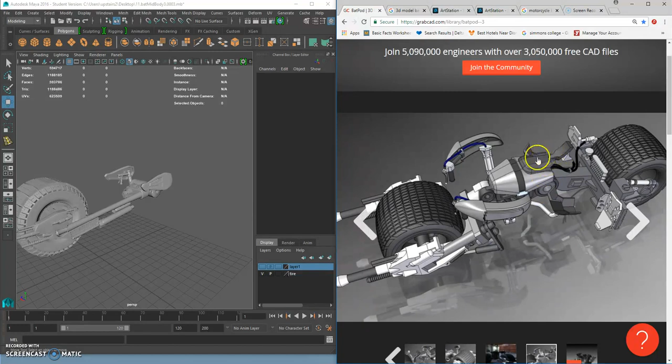Now we have to make the mid body. So it's this thing, kind of like that shape. The rider's going to be sitting here, their butt's going to be here, and their legs are going to be here, and they're going to be kind of gripping this thing. So they're going to be sitting like that.

So let's go ahead and create that thing, create that general shape. And let's go ahead and kick the subdivisions up to 3 each way. Or 2—let's do 3. I think 3 will be good.

Alright, so that's pretty good. Put it right in the middle here. You could do this—let's make it a little bit wider. Alright, good. Alright, so let's go ahead and start shaping this thing up.

Kind of come in here, taper in the back. Alright, control delete—I'm going to get rid of that. I don't want that edge there.

Okay, I'm going to grab these edges here. Let's bring those back, bring those forward. Okay, now what I'm going to do is I'm going to go to insert edge loop. Insert edge is right kind of here-ish. Face, control E, go ahead and scale in.

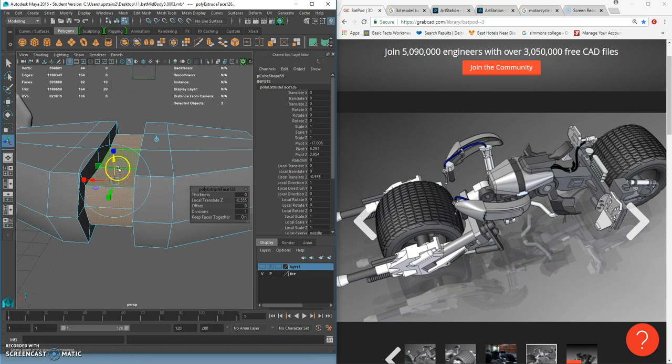Oops. Alright, I like the way that looks. And let's go ahead and hold that edge. Hold that edge, let's go ahead and hold some edges now. Our usual process—set 3 and see what that looks like.

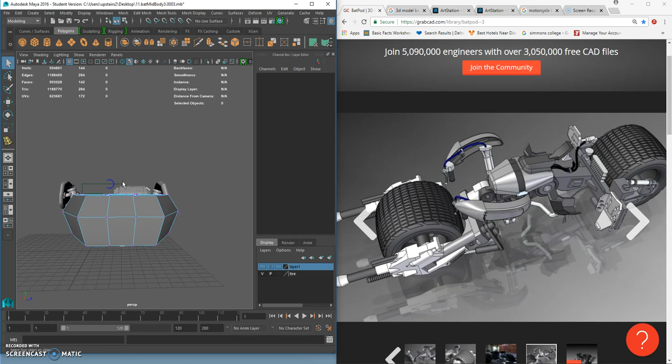Okay, it's not round enough. So what we're going to do is we're going to go to front vertex. Let's see, can we get a good view here? Not really. Okay, so we're just going to have to select these.

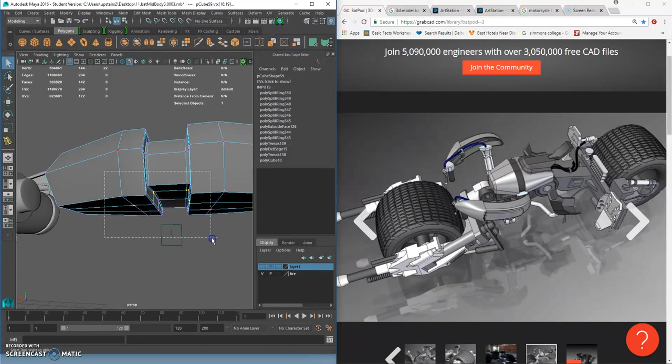And we're going to deselect these. Alright, we don't want to get any of these. Just click, click, click. Alright. Kind of annoying selection to make. Alright, let's hit 3.

That's good. Okay, now what I want to do is widen these out a little. I'm going to insert some edge loops here. And what this is going to do is actually harden that edge up.

So watch what I'm talking about here. So when I do this, watch what it'll do. It'll put in these lines, and that looks really cool. And we're going to do it on the side too.

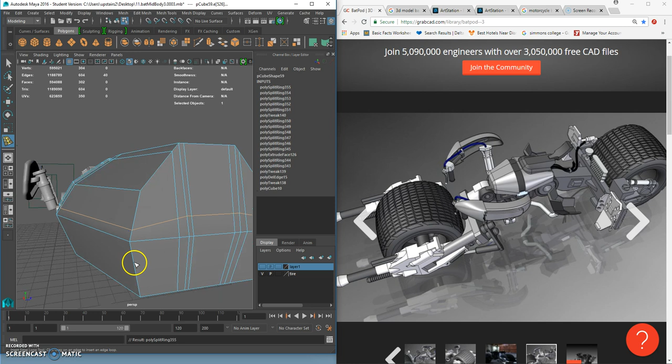You don't have to do this, it's just like a style thing. I just like the way the style looks. Yeah, it looks really cool. That's really nice. Okay, let's go ahead and put our blend on.

Alright, so now we'll go ahead and make the seat.

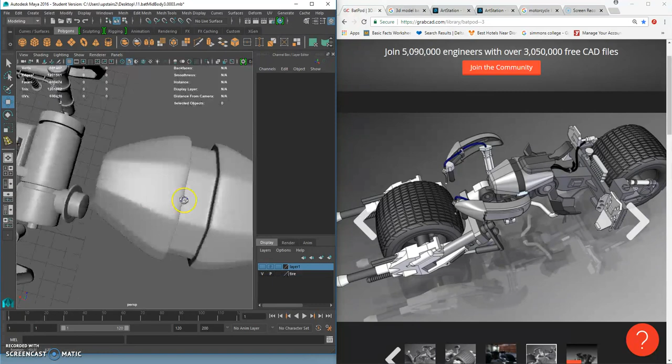We need to attach this somehow, it's going to look like it's attached. So let's go ahead and go to face here. Let's grab this face, hit Control E, W, and attach it.

I can't see that, so I'm just guessing where it ends. It kind of snaps at the end. All right, that looks better.

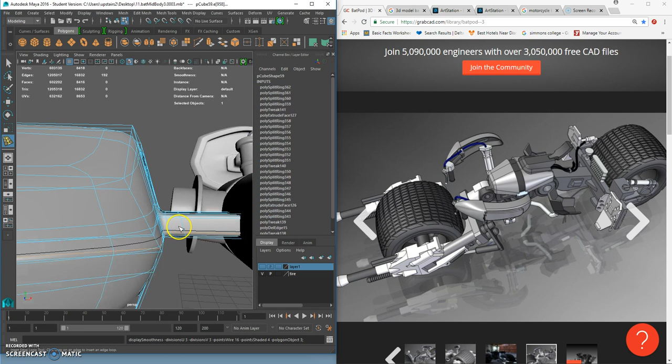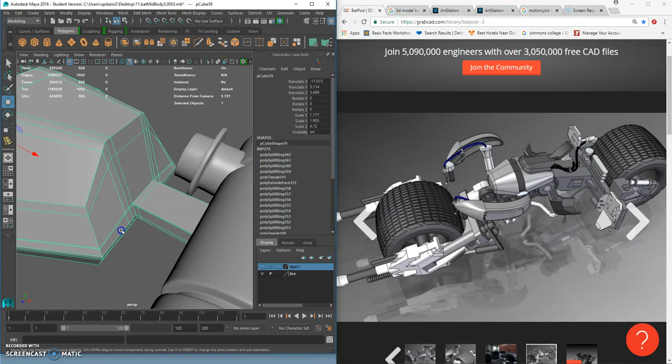Right about there, so now it looks like it's attached. It's not attached that securely, so maybe what you want to do is get another one of these. Control E, and let's scale it in a little. Control E again, W.

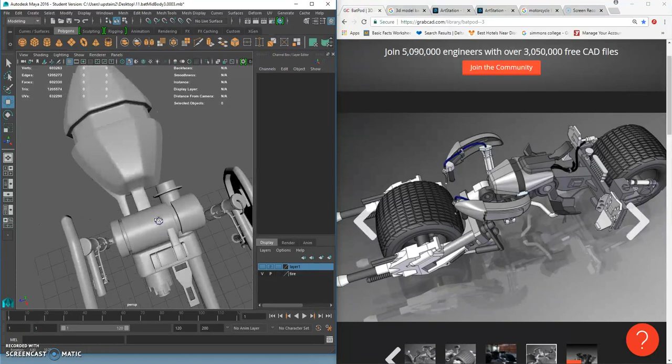I don't know if this will mess up the aesthetic. It's not bad, it's kind of cool. Yeah, we'll keep that, I kind of like it. I don't know, do I? All right, let's keep that.

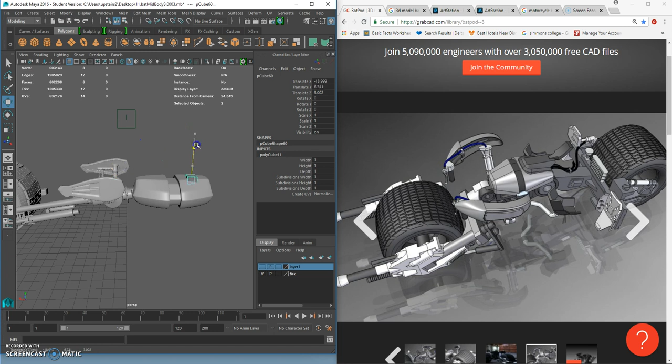Okay, so let's go ahead and make a seat now. So the seat is obviously going to be right on top of here, and that's a pretty standard design, except this thing's kind of cool. So we'll mess around with that.

And it kind of gets bigger at the bottom. So what we'll do is we're going to go ahead and scale this down. I'm just going to bring it up. Face, I'm going to Control E and bring it down. And we're going to scale it out. Control E, W, and bring it down. So that'll be kind of how the bottom's going to work.

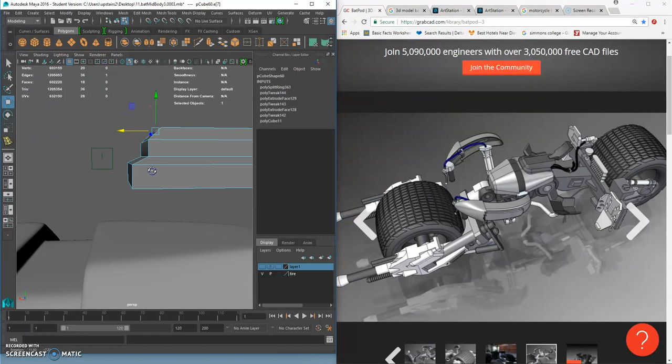And what we could do is do something like this. We're going to kick that in, so that'll be that. I still think this is a little too big, so let's bring that down. Okay, so far so good.

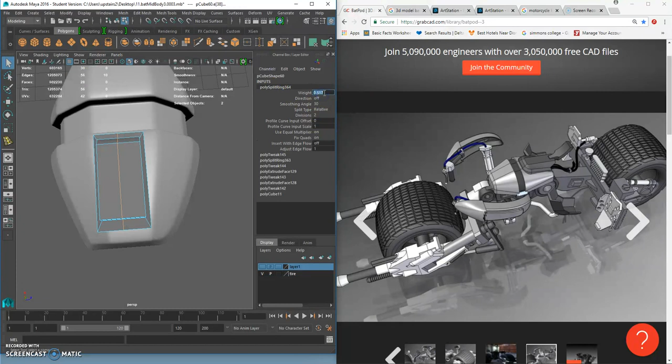And let's go ahead and insert edge loop here. And what we're going to do with this loop, we want this to be a 0.50, just so we know it's in the middle. Not a big deal if it's not, really, but it'll just look a little better if it is.

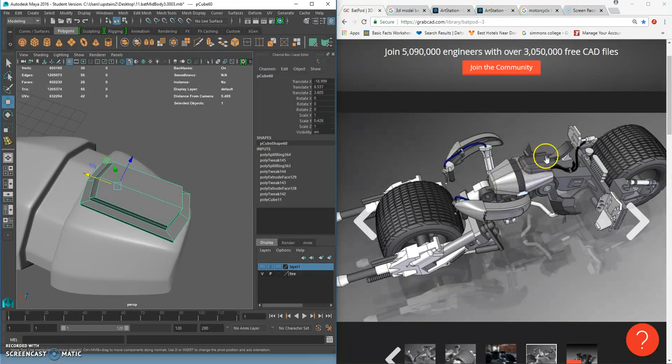And we'll add more edges later. Let's go ahead and cut out a little. We'll cut out a little insert here. Okay, here and here, and there. Let's go ahead and straighten that out. Okay, the insert's going to be right back here.

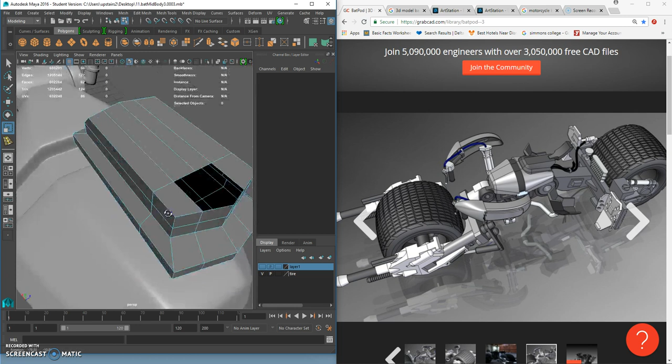I'm just going to go ahead and delete that. Okay, and go to Edge, double click this edge, hit Control E and W. And scale, we're going to scale it. Then Control E and W and bring it down.

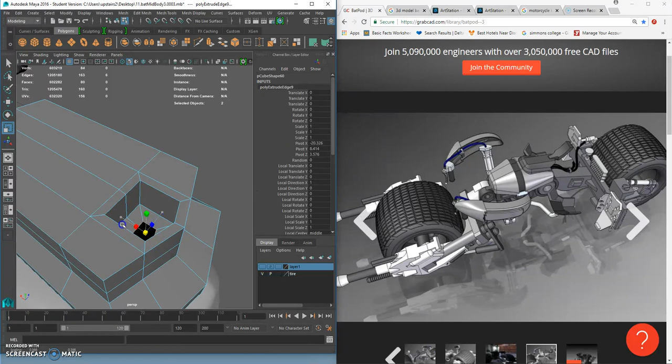Just so we have a little cutout here. And let's go ahead and Control E and scale this in. Go to Vertex, highlight these verts, and go to Edit Mesh, Merge to Center. Okay, see, that's not going to really matter because you're not going to see that.

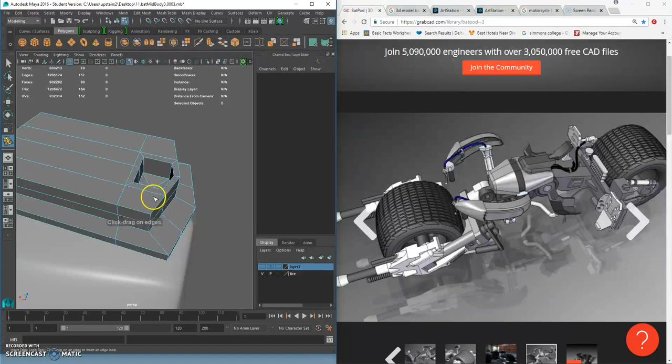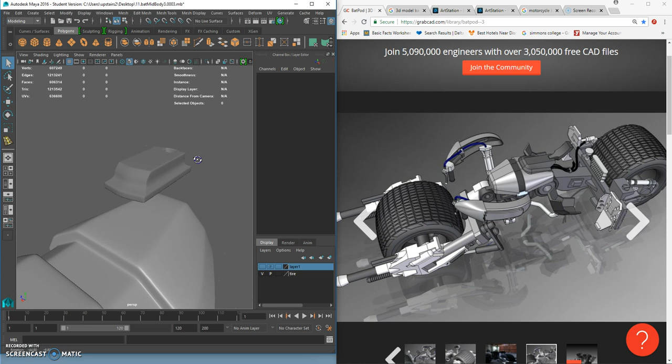Okay, this looks good. Let's go ahead and insert some edge loops now. All right, let's hold some corners. Let's see.

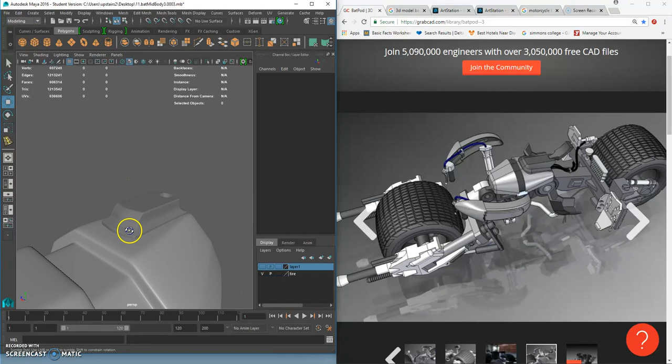Not really liking this. I don't like this piece. So what I'm going to do is I'm going to go ahead and delete that. We're going to try it again, with a different piece of geometry this time. Okay, we're going to go with a different design. I didn't like the other design. Let's go with this one. This will be, I don't know, a little bit easier to do too, I think.

Okay, so what we'll do is this. Sometimes when you have a model, it might not always look good, so you have to redo it. That happens.

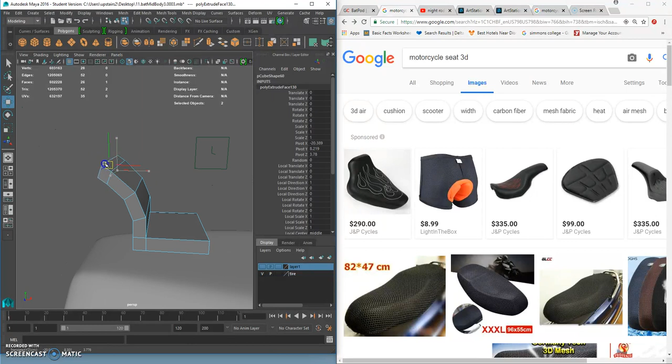And it kind of curves up gradually, so we'll do this. Let's do this. And we'll do this. Right about there, okay, that's going to be pretty decent. And let's bring it up a little. We'll bring it in. And that'll basically do it.

So let's go to Insert Edge Loop. Sometimes simpler is better. Sometimes a nice clean design without any kind of extra detail will look pretty good. So let's see what this looks like. Yeah, that looks perfect, that's good. It looks kind of standard for a Batman seat, that's okay.

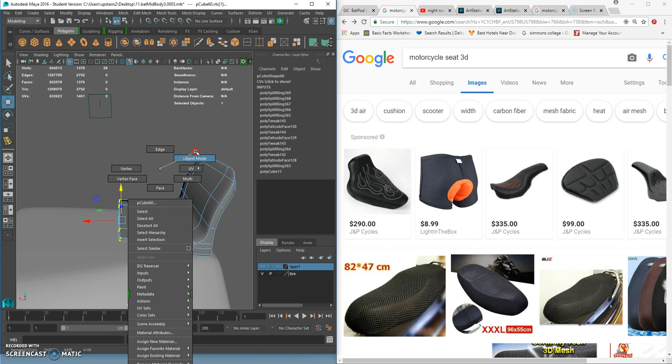Let's make it a little bit wider. Let's make it a little narrower. We'll put it right at the back. We'll kind of put it right into the seat here. All right, oops. All right, that'll kind of work.

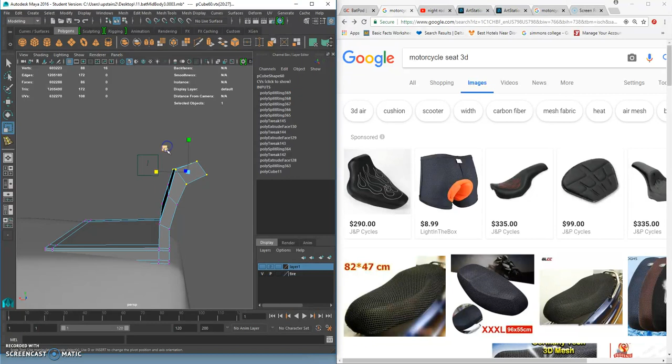And maybe what I could do is go to these verts, scale them out a little. And let's go to these and bring them in a little.